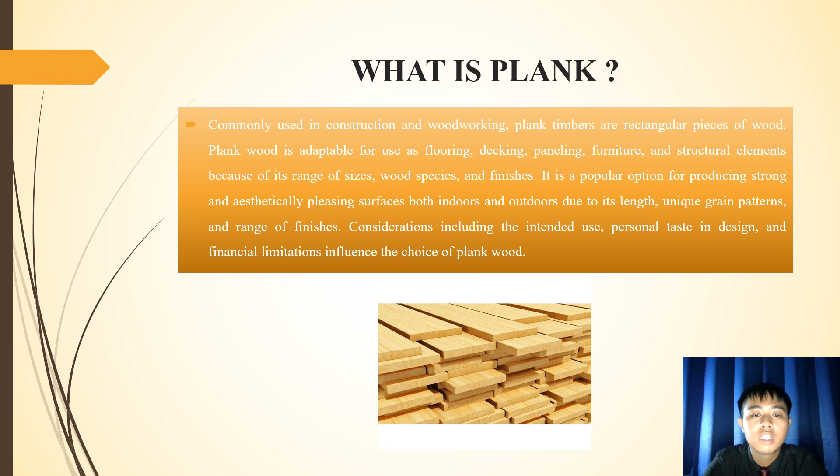So I will talk about plank. Basically, what is plank? Commonly used in construction and woodworking, plank timbers are rectangular pieces of wood. Plank wood is adaptable for use as flooring, decking, paneling, furniture, and structural elements because of its range of size, wood species, and finishes. It is a popular option for producing strong and aesthetically pleasing surfaces, both indoors and outdoors, due to its length, unique grain patterns, and range of finishes. Considerations including the intended use, personal taste in design, and financial limitations influence the choice of plank wood.

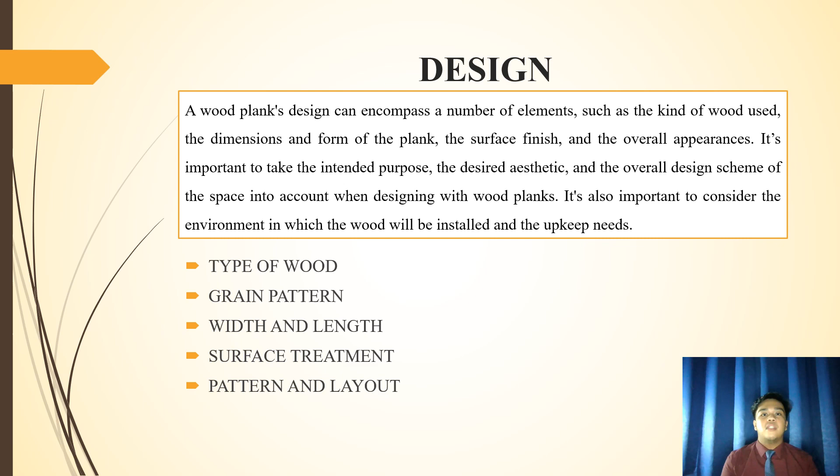Before choosing your desired design of wood planks, you can encounter a number of elements such as type of wood, grain pattern, width and length, surface treatment, pattern, and layout. All of that can affect the overall appearance of the wood plank design. It's also important to take note about the environment and the space that you will install the wood plank.

Next, there are four types of wood that I can suggest before choosing the right type of wood for you, which is mahogany, teak, walnut, and oak wood. It's crucial to remember that this type of wood has different character and quality depending on your need.

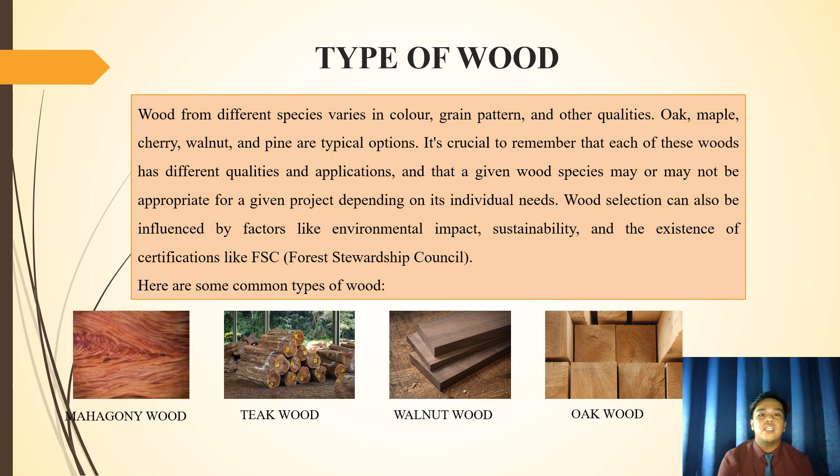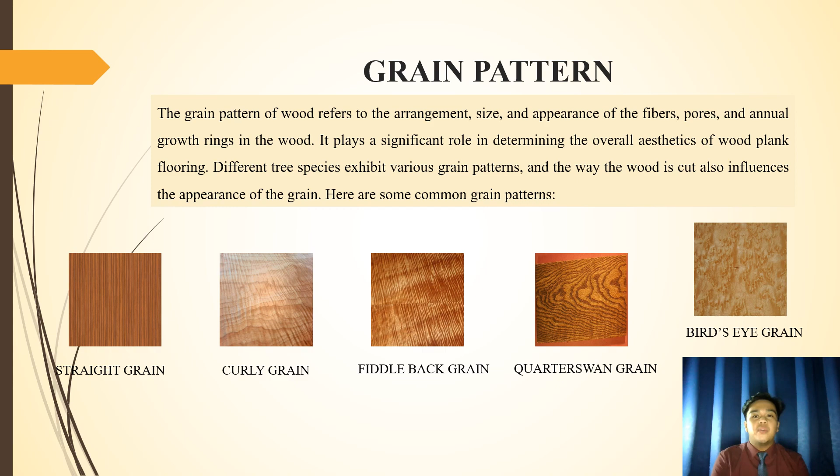Next, I will talk about grain pattern. There are a variety of grain patterns that you can choose from depending on your budget. Grain pattern can affect the overall aesthetic of your flooring. The way the wood is cut also influences the look of the grain.

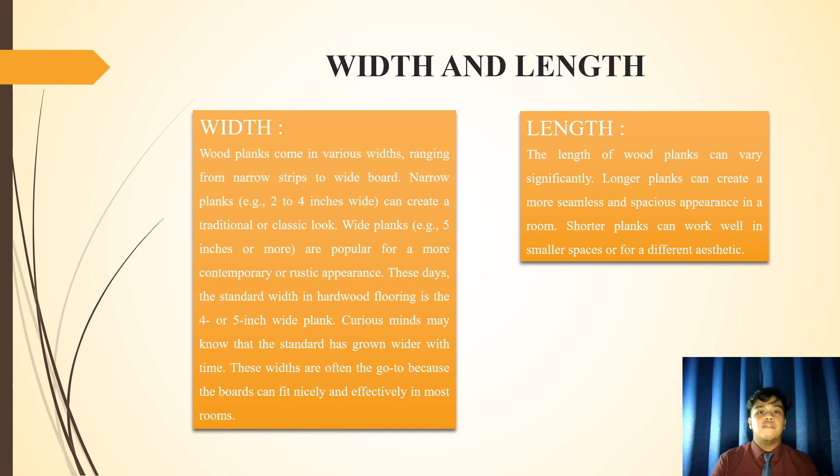Then I will talk about width and length. Wood planks come in various widths from narrow to wide. For a classic and traditional look, you can choose planks that are 2 to 4 inches wide. These days, the standard for wood plank is 4 to 5 inches wide. After that, length. Longer length can create a more seamless appearance, while shorter planks can create a different look in smaller rooms.

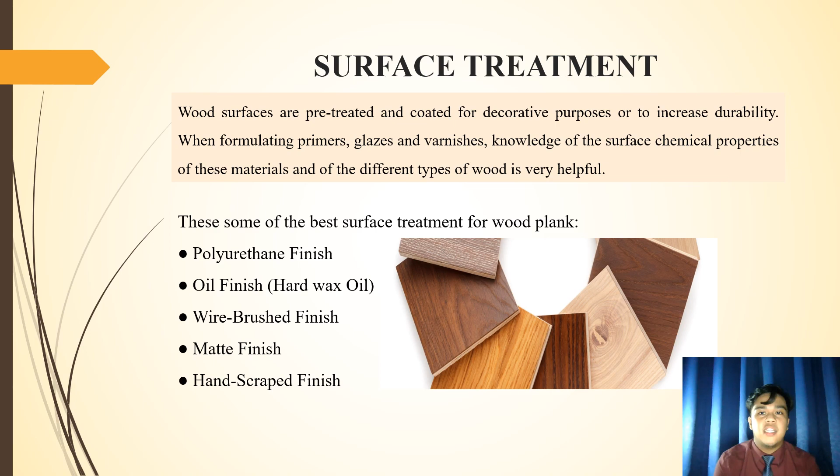After that, surface treatment. Wood surface needs to be protected from water and climate changes. These are some of the products that are commonly used, such as polyurethane finish, oil finish, wire brush finish, matte finish, and lastly, hand scrape finish.

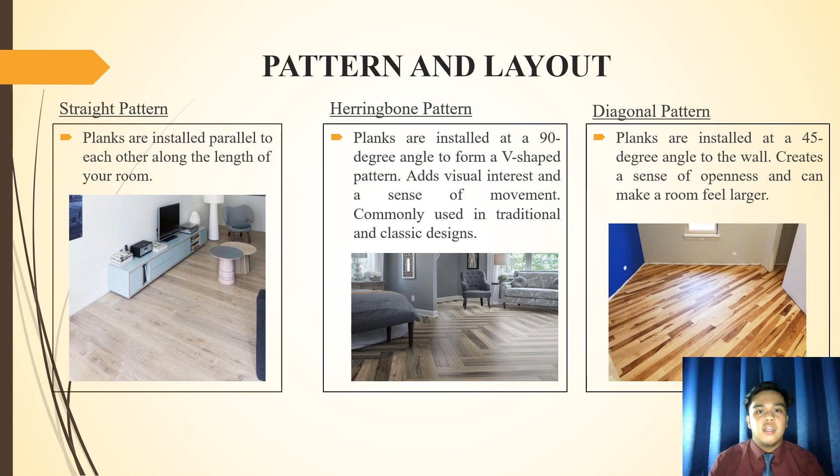Moreover, pattern and layout. You can get creative with pattern and layout, such as herringbone, where planks are installed at a 90 degree angle to form a V shape that is usually used in classic and traditional design. Other than that, diagonal pattern where planks are installed at 45 degrees can make a room feel larger. Lastly, the most famous is straight pattern, which is the basic and the easiest one to install.

In my part, I'm gonna explain about delivery, handling, and storage of timber floor finishes. The successful delivery, handling, and storage of timber floor finishes like parquet, plank, or strip are crucial to preserving the quality and integrity before installation.

First, delivery: protection during transportation. Ensure adequate protection from moisture, extreme temperature, and physical damage during transit. Proper packaging and handling minimize the risk of scratch, dent, or warping.

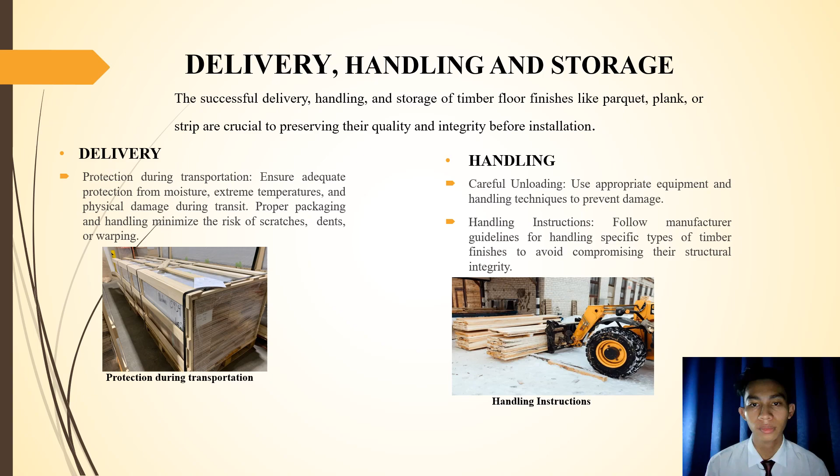Next, handling: careful unloading, use appropriate equipment and handling techniques to prevent damage. Handling instruction: follow the manufacturer guidelines for handling specific types of timber finishes to avoid compromising the structural integrity.

And lastly, storage: climate controlled environment. Store timber finishes in a controlled environment to prevent exposure to excessive moisture, direct sunlight, or extreme temperature. Maintain consistent humidity level to prevent expansion or contraction.

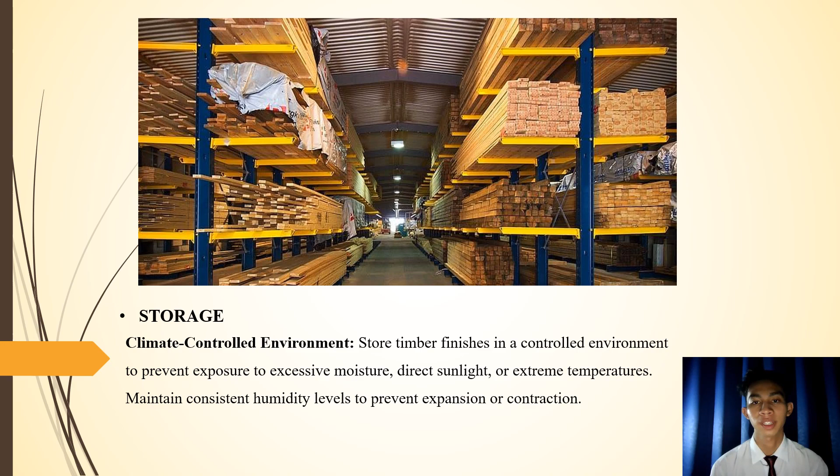So I will talk about preparatory works. It is to ensure a smooth and long-lasting result. A number of preparatory works are necessary before diving into the complex process of applying finishes to plank timber floors. During the preparatory stages, careful planning and execution are critical to the success of any timber floor finish implementation. We define the essential groundwork in this guide, which forms the basis for obtaining superior plank timber floor finishes.

So the first one we have is subfloor inspection and preparation. It is to conduct a thorough examination of the subfloor to identify any structural issues, moisture problems, or irregularities. It is also to ensure that the subfloor is clean, level, and adequately dry before proceeding with any finish application.

So the next one is acclimation of timber planks. It is to allow the timber planks to acclimate to the environment in which they will be installed. This helps prevent issues such as warping or expansion after the installation.

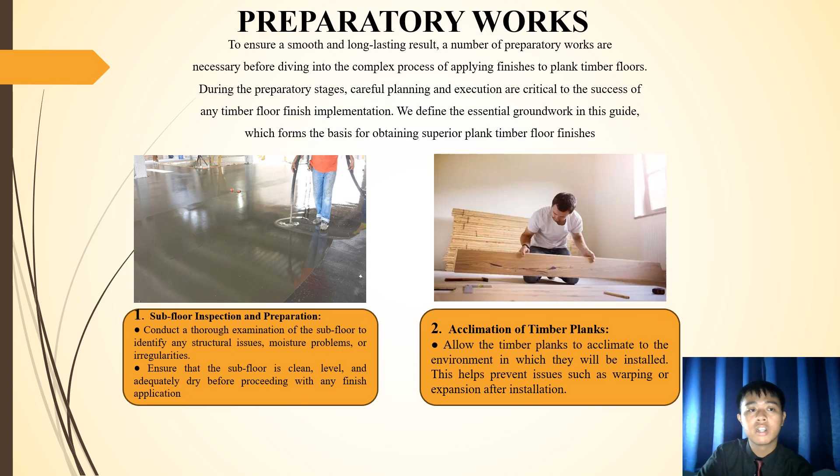The third step is sanding and surface preparation. We begin with sanding the timber surface to create a smooth and even base. This process removes imperfections, rough spots, and any existing finishes.

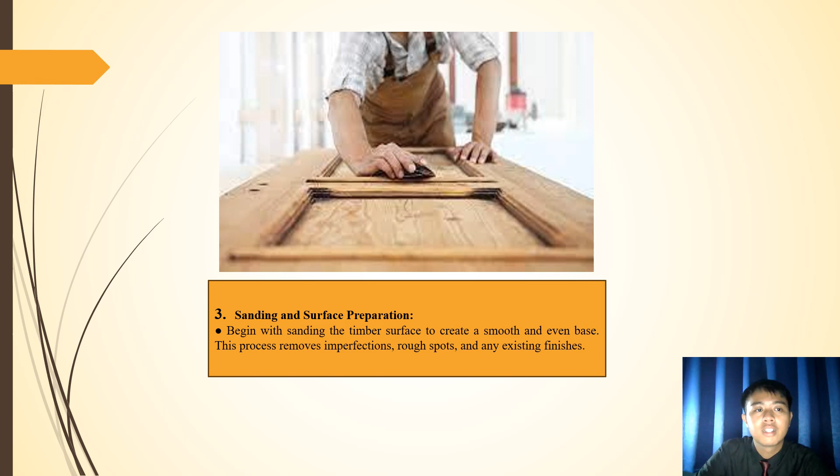The fourth step is layout planning. Plan the layout of the plank timber installation, taking into account room shape, natural light sources, and aesthetic preference. Consider starting the installation from the center of the room for a balanced and visually appealing result. The fifth step is moisture barrier installation.

Install a moisture barrier if the subfloor is in direct contact with the ground or is susceptible to moisture. The next step is room preparation.

Remove baseboards, trim, and doors to facilitate a seamless installation against the wall, and ensure the room is clear of furniture and obstacles to allow for an efficient and uninterrupted installation process.

Last but not least, safety measures: adhere to safety protocols during the installation process, including the use of personal protective equipment and proper ventilation if using adhesives.

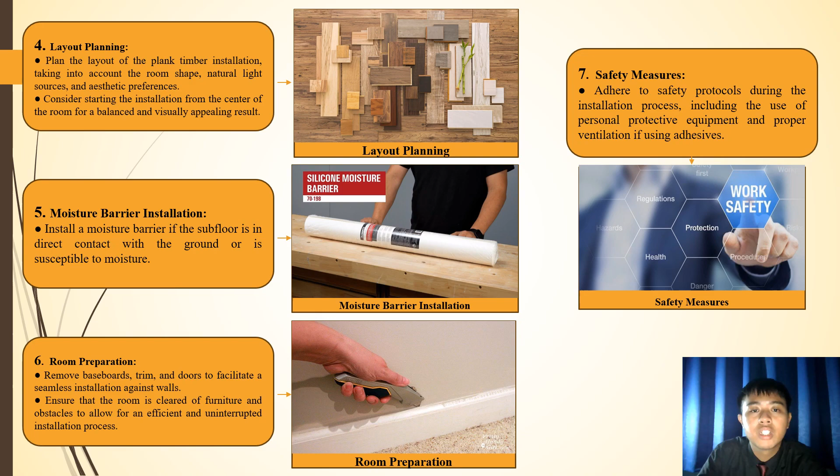Next part: installation of timber floor finishes. Plank installation requires accuracy and adherence to particular methods specific to each type. There are three steps to install the plank, and the installation needs to be done correctly.

First, adhesive application: apply specialized adhesive directly to the subfloor or underlayment following manufacturer guidelines. Next, precise placement: carefully install plank tiles to ensure accurate pattern, alignment, and interlock, keeping the spacing between tiles constant using spacers.

Weight and pressing: using a weight instrument or roller, evenly apply pressure to the installed tiles to guarantee correct adherence to the subfloor.

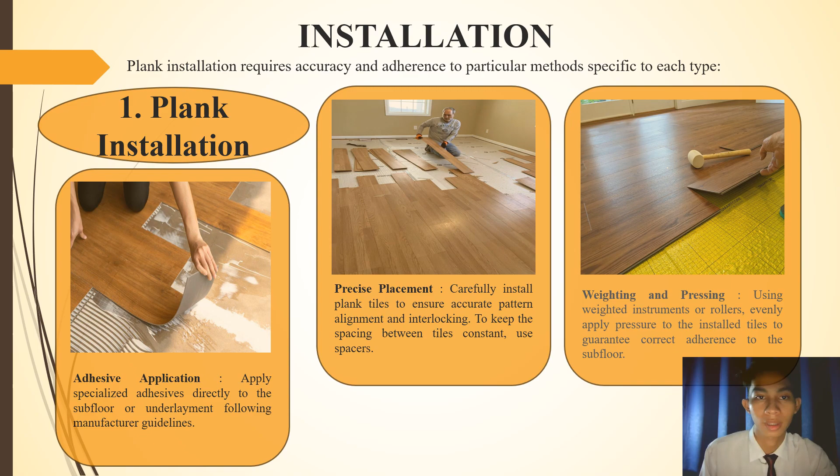Before installation, it is really important to check alignment considerations, as this makes it easy to create a uniform appearance. Make sure each piece aligns straight and has a consistent gap between it. For visual appeal, layout and alignment must be done with meticulous attention to detail.

Installing plank requires a professional craftsman, because the intricate pattern of the plank means installing it requires a certain level of professionalism. If you want to install plank or other timber finishes, think about hiring seasoned installers who understand the unique needs. Apart from that, following manufacturer guidelines is really important regarding installation techniques, adhesive tools, and environmental factors.

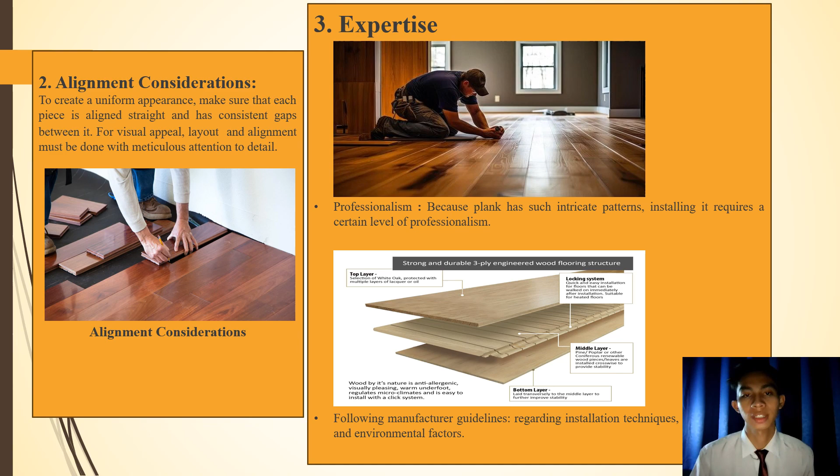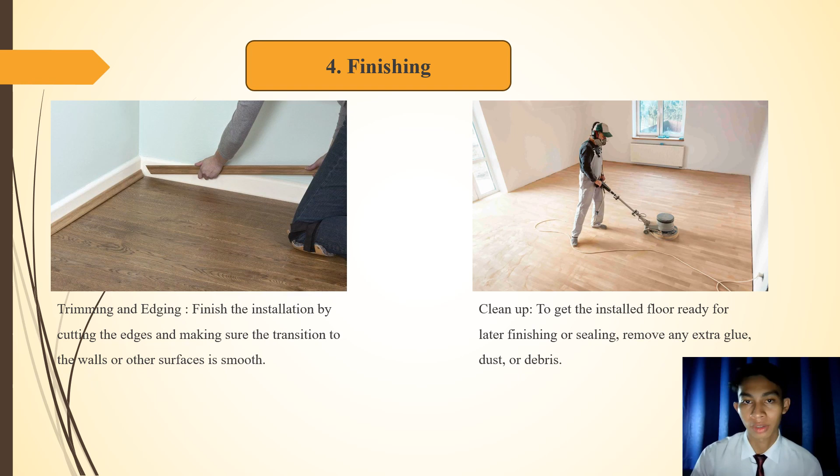Lastly, finishing. After all the installation of plank timber floor finishes, you need trimming and edging to finish the installation by cutting the edges and making sure the transition to the wall or other surface is smooth and clean, getting the installed floor ready for later finishing or sealing. Remove any extra glue, dust, or debris.

Now I will talk about protection. Protecting timber floor finishes is crucial for maintaining their aesthetic appeal, durability, and longevity. Here are several key measures and tips for effectively protecting timber floor finishes.

The first one is avoid high heels and sharp objects: encourage a shoes-off policy to minimize the risk of abrasive dirt and rocks scratching the floor.

Next is regular cleaning: implement a regular cleaning routine using a soft damp mop or a vacuum cleaner with a soft brush attachment.

Next is furniture pads: attach felt or rubber pads to the bottom of furniture legs to prevent scratches and dents when moving or repositioning furniture.

And the next one is area rugs and mats: place area rugs or mats in high traffic areas, especially near entryways and in front of frequently used furniture.

Next is protective coating: consider applying additional protective coatings such as floor wax or polish as recommended by the manufacturer.

Last but not least is temperature and environment: limit exposure to direct sunlight, which can cause discoloration or fading over time. Use curtains or blinds to shield the floor from intense sunlight.

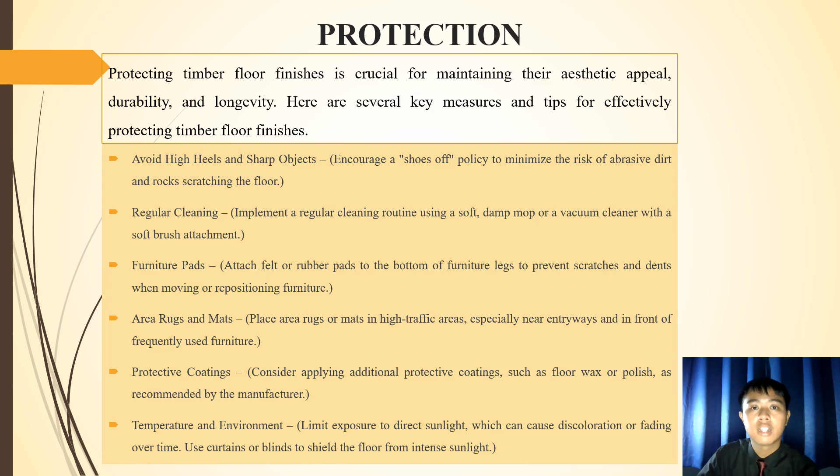Defects in timber floor finishes can arise from various factors, including installation issues, environmental conditions, or simply wear and tear over time.

Rectifying those defects is essential to maintain the aesthetic appeal and structural integrity of the floor. So today, I would like to talk about the defects and rectifications for all the floor finishes that we know.

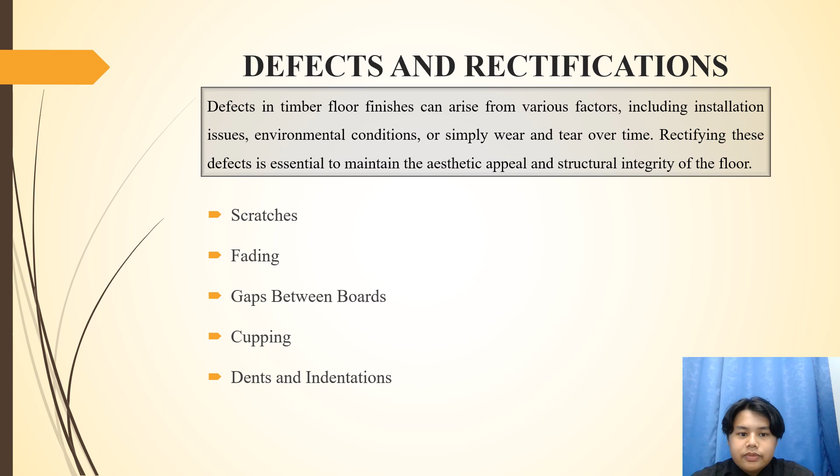There are a few defects and rectifications I would like to present today. First, scratches. After that, fading. Then gaps between boards. After that, cupping. And lastly, dents and indentation. So let's proceed.

First, scratches. These happen because of furniture movement, pet claws, or abrasive dirt. How do we fix it? It can be fixed by addressing it with a touch-up marker or wax. For deeper scratches, consider sanding and refinishing the affected area.

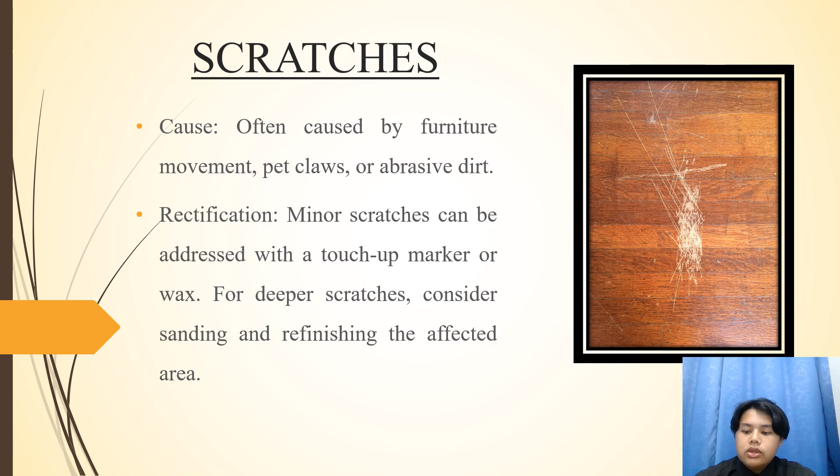After that, fading. This happens because of exposure to sunlight for too long. Floor finishes that are exposed to sunlight will become more faded over time.

To fix it, minimize sunlight exposure using curtains or blinds. In extreme cases, sanding and refinishing can restore the color. We can also use curtains or blinds to prevent fading from happening.

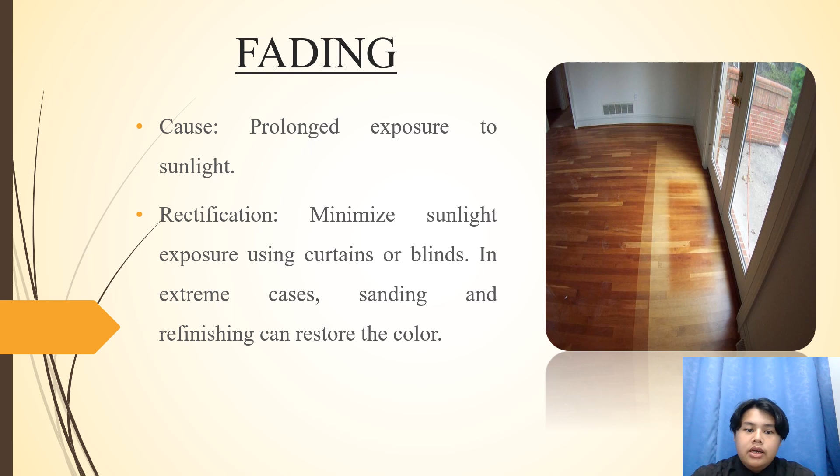After that is gaps between boards. The cause is a change in humidity causing wood to expand and contract. Humidity is the most important factor when it comes to floor finishes, and changes can cause gaps to form as the wood expands and contracts.

How do we overcome this? In some cases, the gaps may close naturally with changes in humidity. If persistent, filler strips or wood putty can be used to fill the gaps that have opened up because of the humidity and expansion.

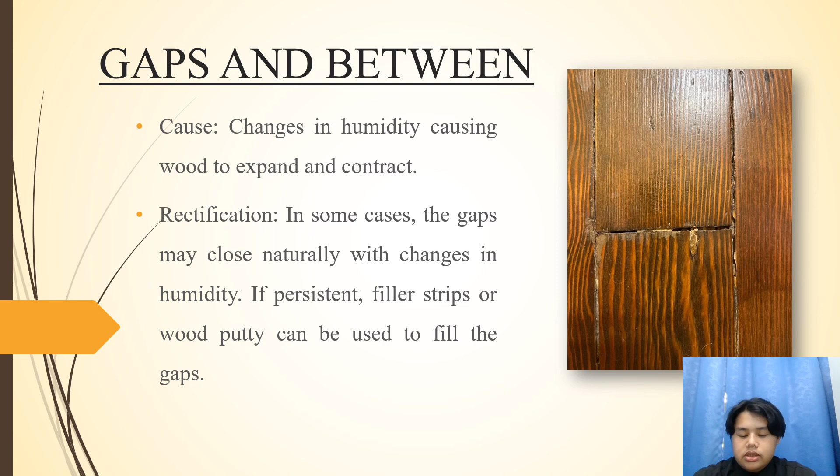After that, cupping. What causes cupping? It's caused by moisture imbalance on the floor surface. If the moisture is imbalanced, the surface will become more cupped, causing imbalance on the floor.

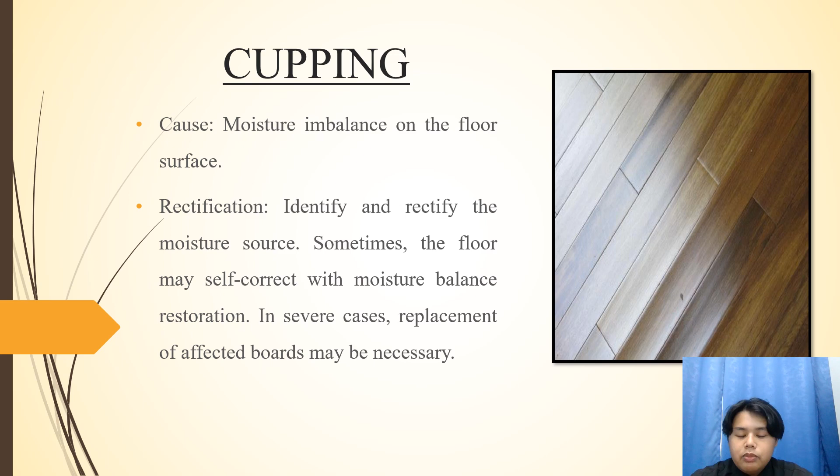How do we overcome this situation? We can identify and rectify the moisture source. Sometimes the floor may self-correct with moisture balance restoration. In severe cases, replacement of affected boards may be necessary.

Lastly, dents and indentation. These are caused by heavy furniture, high heels, or dropped objects. There are many more causes, such as when we move furniture in the house, the roughness of the furniture can cause dents to the floor finishes. How do we overcome this?

For minor dents, we can use a damp cloth and a hot iron to steam the wood fiber back into place.

For deeper dents, we consider wood filler followed by sanding and refinishing. If the damp cloth and hot iron method doesn't help, we consider it a deeper dent and proceed with wood filler, sanding, and refinishing.